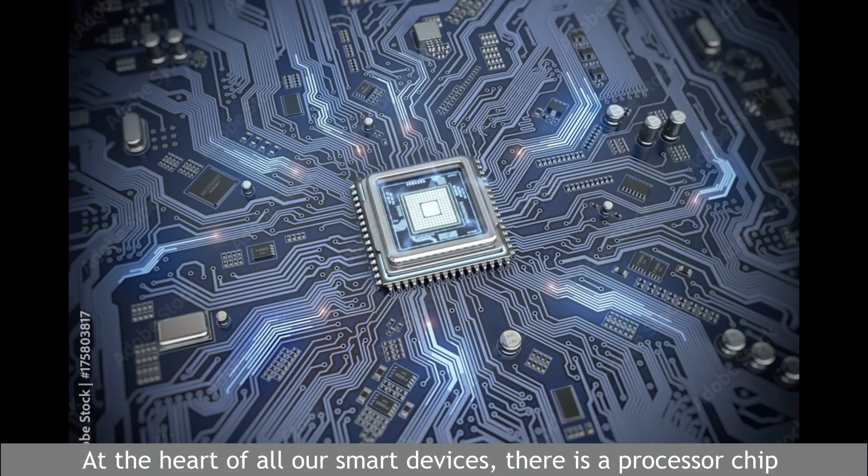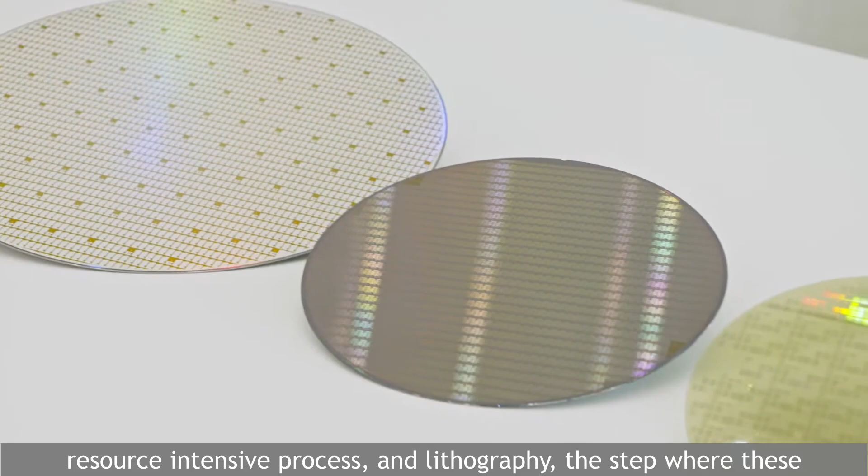Hello, we're Team 0 Degrees, and our project is finding quiet cooling alternatives to the lithography machine's nano-precise scanning stage. At the heart of all our smart devices is a processor chip comprised of billions of tiny structures made of semiconductors like silicon. The process of turning silica sand into a packaged chip is a long, resource-intensive process, and lithography, the step where these nanometer-scale structures are engraved, is the most energy-intensive of them all.

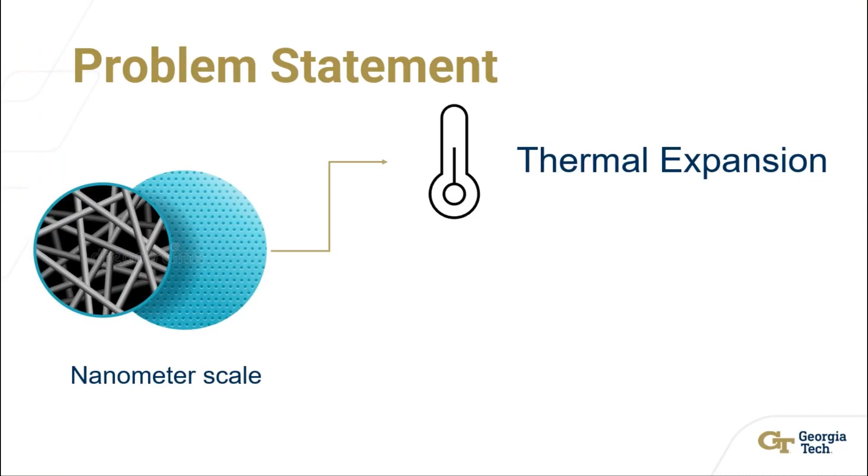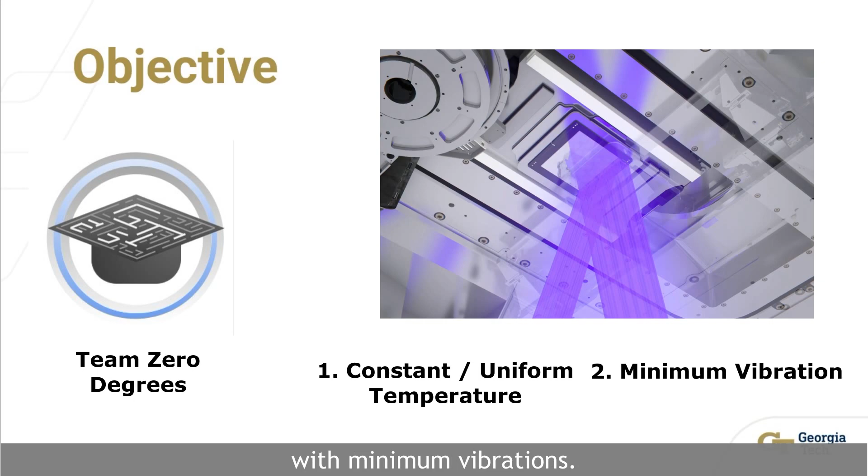ASML, our project sponsor, accomplishes this using high-energy ultraviolet light reflected off a nano-precise pattern held in a moving reticle stage in their most advanced lithography machine. Any thermal expansion or dynamic vibration can cause defective semiconductors, wasting time, energy, and material for manufacturers. Team 0 Degrees has the objective to explore and prove methods to maintain the reticle at a constant, controlled temperature with minimum vibrations.

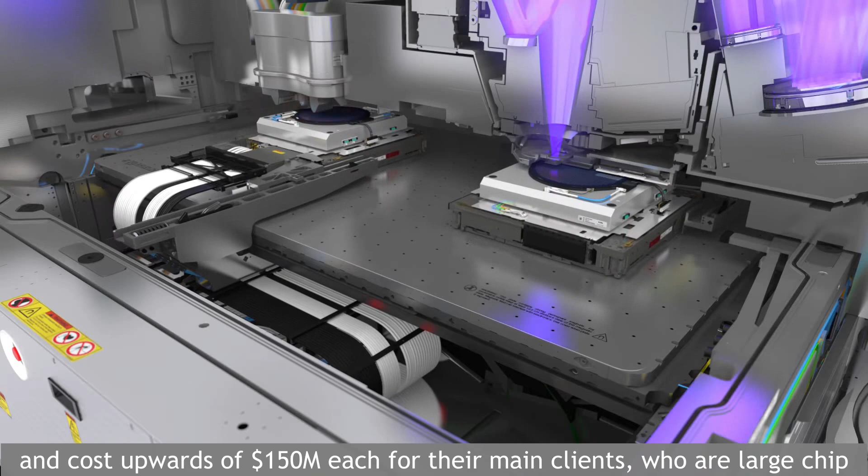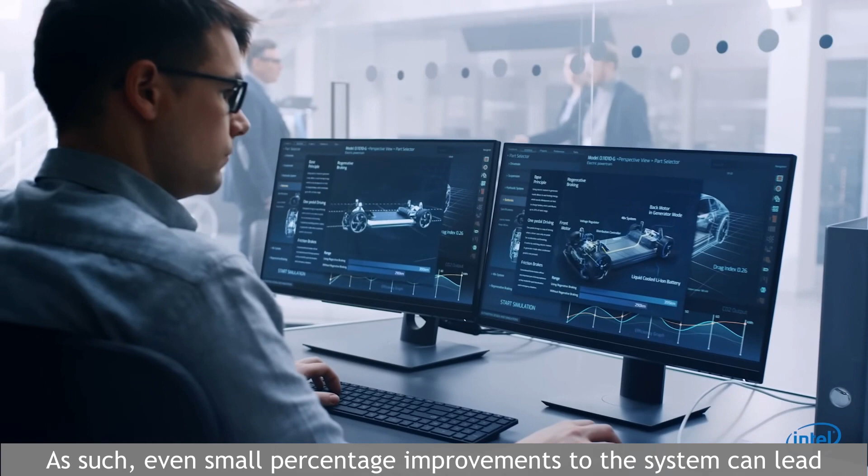EUV lithography machines are solely produced by ASML and cost upwards of $150 million each for their main clients, who are large chip manufacturers like TSMC, Samsung, and Intel. As such, only a couple dozen machines are rolled out in any given year, but each machine can expose thousands of wafers of chips each day. As such, even small percentage improvements to the system can lead to drastic benefits for ASML, their clients, and the end user.

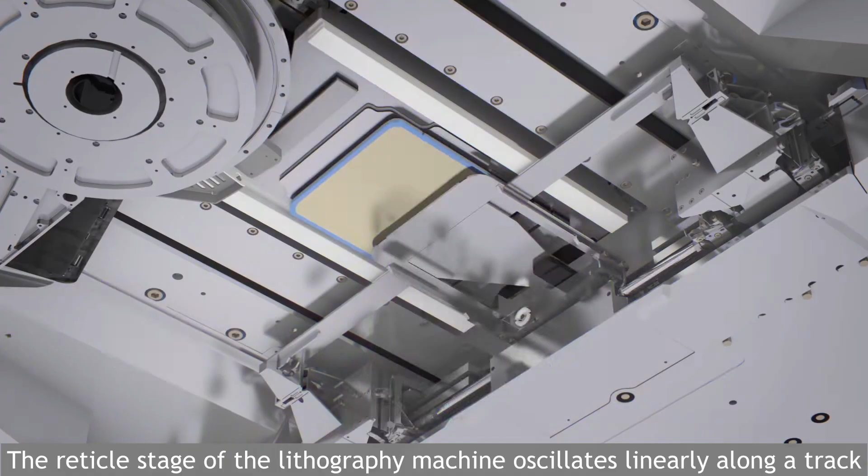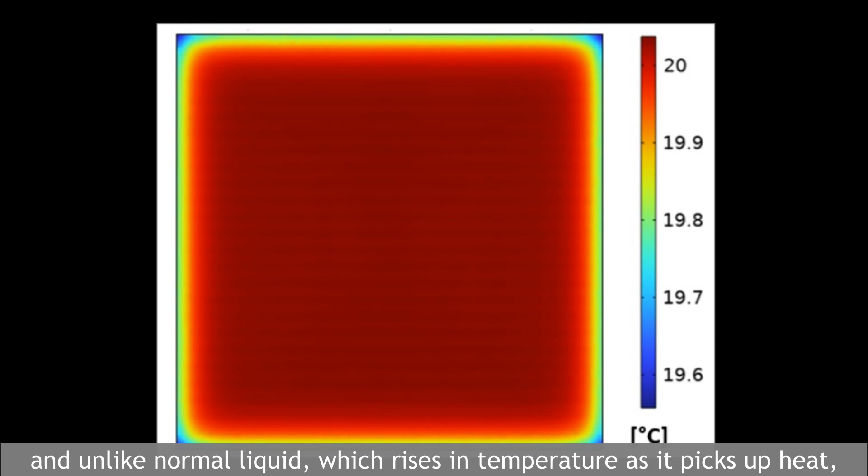The reticle stage of the lithography machine oscillates linearly along a track, and ASML's current solution uses water channels to cool the stage. Our design prioritizes minimizing distortion through passive phase change, since a passive device reduces the amount of dynamic linking to other objects in the system. Reduced operating pressure also reduces mechanical deformation. And unlike normal liquid, which rises in temperature as it picks up heat, fluid undergoing phase change will maintain a constant temperature throughout, keeping the entire length of the channel at the same uniform temperature.

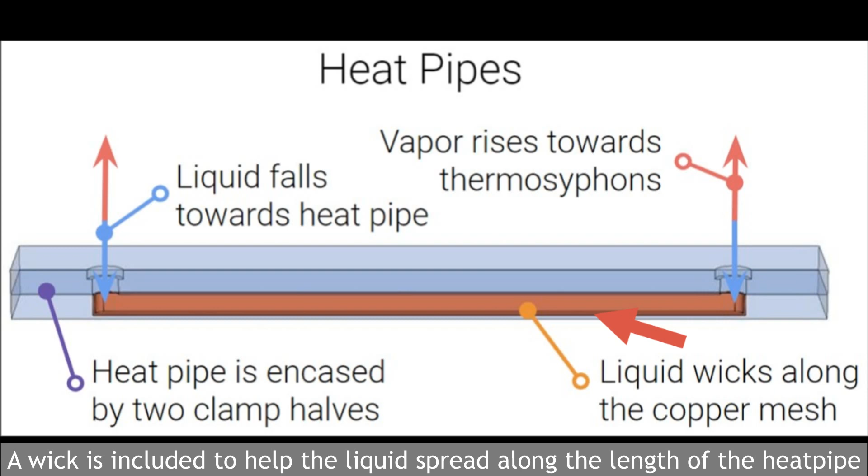Our design, a hybrid heat pipe and thermosiphon array, will sit within the internals of the stage. Heat pipes are passive devices which operate in a self-contained cyclic motion of liquid and vapor. A wick is included to help the liquid spread along the length of the heat pipe. As heat from the target body transfers to the walls of the heat pipe, heat is picked up by the liquid and it evaporates. The vapor travels up the thermosiphons towards a condenser, where the heat is rejected and, like rain, it falls towards the pipe as liquid to be cycled again.

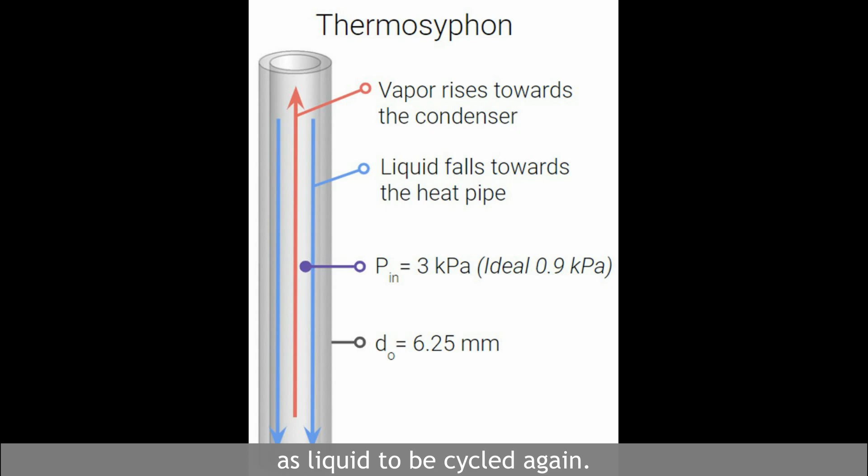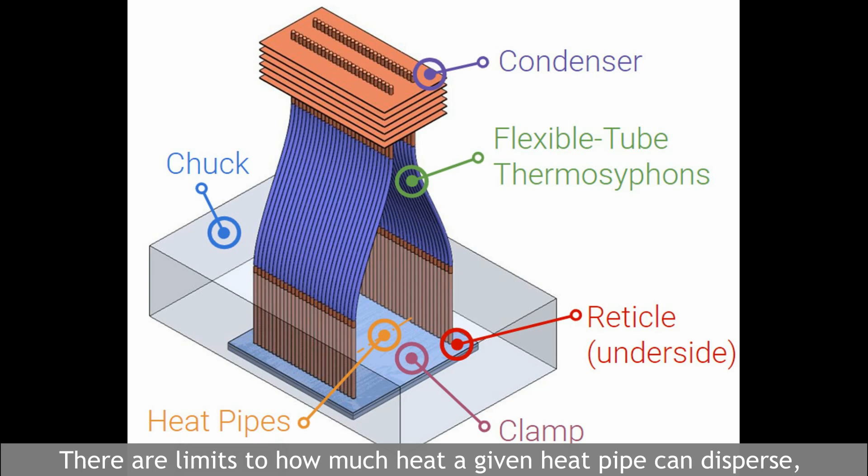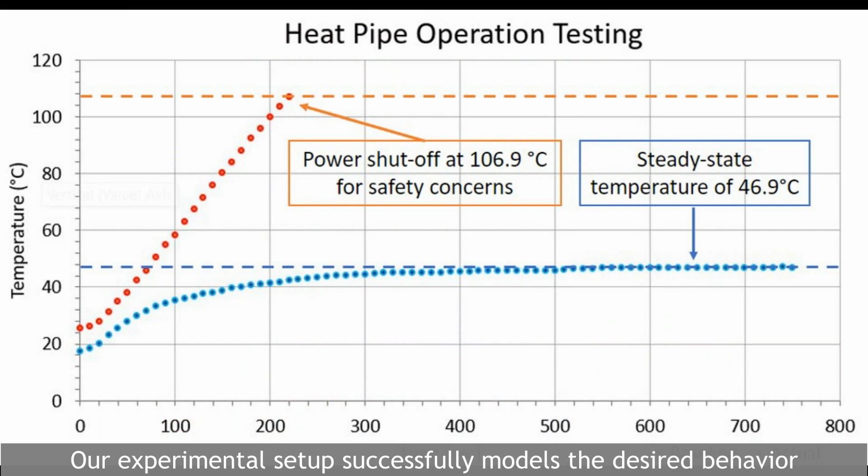The temperature at which phase change occurs can be manipulated by changing the internal pressure of the system, allowing for precise tuning of the operating conditions. There are limits to how much heat a given heat pipe can disperse, but our design can meet not only the current demands of ASML, but also their future aspirations as they continue developing their machines. Our experimental setup successfully models the desired behavior by maintaining the heat pipe exterior at a steady, uniform temperature. Our prototype also models what the system would look like should it be installed into ASML's machines.

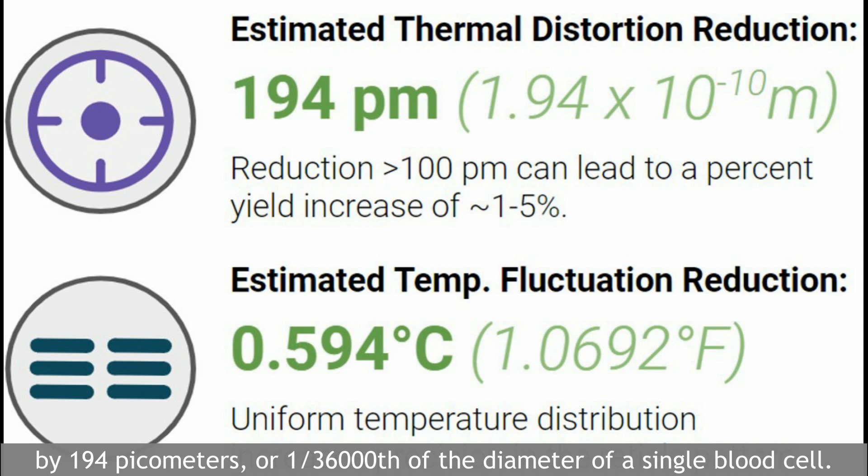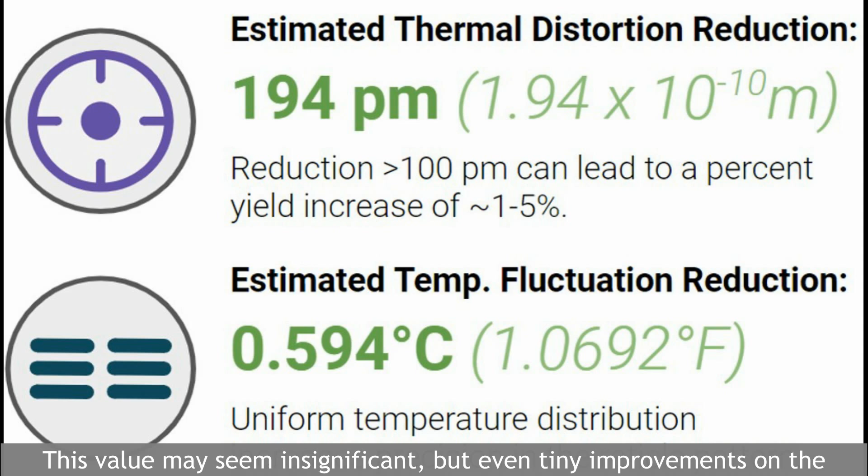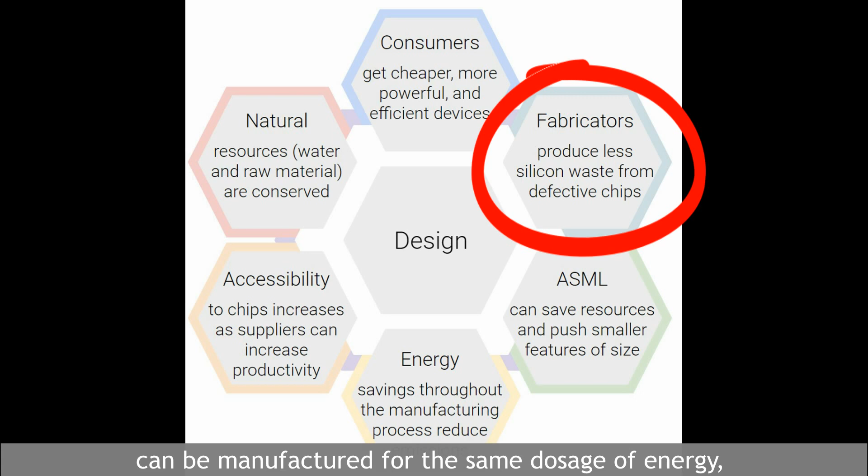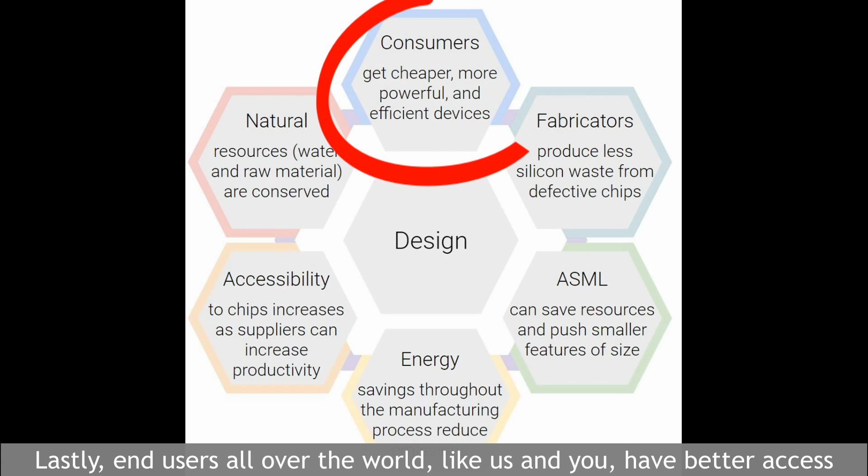With less deformation, smaller-sized features can be pushed, and more chips can be manufactured for the same dosage of energy, making the entire process more efficient. Less waste from defective chips will help conserve resources and reduce the industry's carbon footprint. Lastly, end users all over the world, like us and you, have better access to cheaper, more efficient, and more powerful devices, including phones, medical devices, cars, computers, and more.